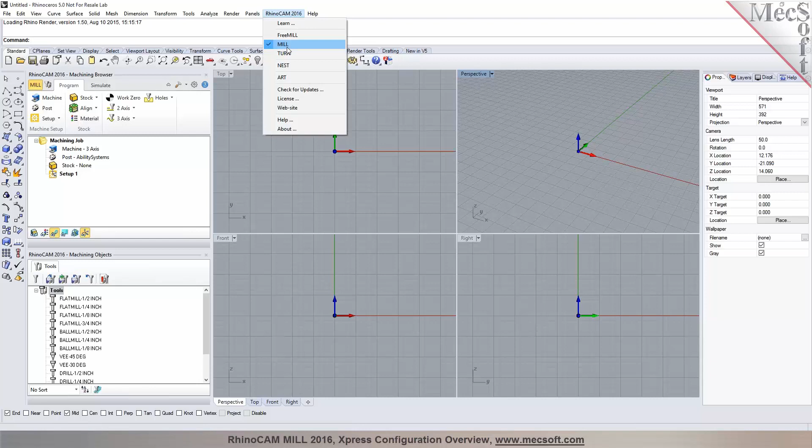This Xpress configuration offers both 2- and 3-axis milling and drilling. There's a limited set of machining operations under 2-axis and 3-axis milling. Once you have the RhinoCAM plugin loaded in Rhinoceros, and if you selected the Xpress configuration in the mill module, you will see the machining browser interface gives you access to 2-axis, 3-axis, and hole machining.

Under the 2-axis, you will have access to facing, pocketing, profiling, and engraving toolpath methods. Now, if you need more options in 2-axis, if you need remachining, high-speed pocketing, V-carving, 2-axis roughing, T-slot machining, then you would want to look at upgrading it to the standard, expert, or if you need remachining as well, you can look at pro or premium configurations.

Under the 3-axis methods, the Xpress configuration includes horizontal roughing and parallel finishing. If you need more finishing options like finishing in levels, which is called horizontal finishing, or radial and spiral machining, those are available starting with the standard configuration. If you need advanced 3-axis machining, those are available in pro and premium configuration.

Now, you can also program holes or drill holes using hole machining and drilling. Drilling, deep drill or peck drilling, break chip, countersink - all of these are offered in the Xpress configurations. If you need tap, bore, and reverse bore operation, those are included starting with the standard configuration of the product. So you can refer to the feature list for detailed information about features offered in each configuration.

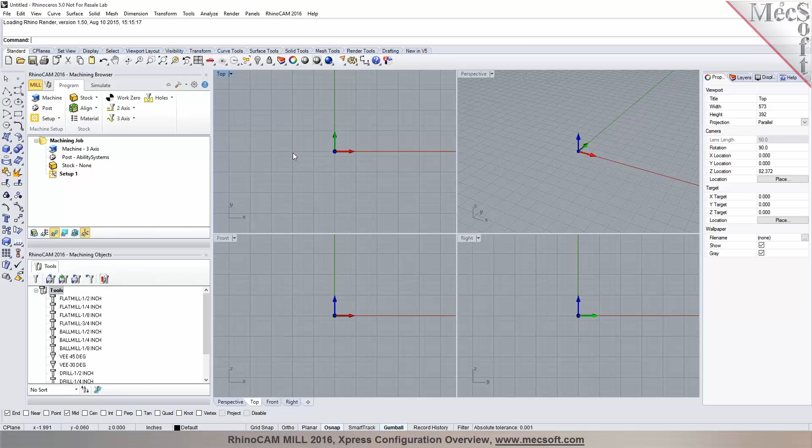Now, you might be wondering, what can I do with the Xpress configurations? What kind of parts can I work with it? So to illustrate this, today I'm going to go ahead and bring in a file into Rhinoceros. You could pretty much open any files that can be loaded into Rhinoceros.

Rhinoceros offers you a wide range of file translators. I'm not going to go into details into those, but any file that you can bring into Rhinoceros, you could program it with the CAM Xpress product. So you could be working with just 2D drawings. You can program 2-axis toolpaths, or if you have solid, surface, or even a mesh geometry, you could program both 2- and 3-axis machining operations with those.

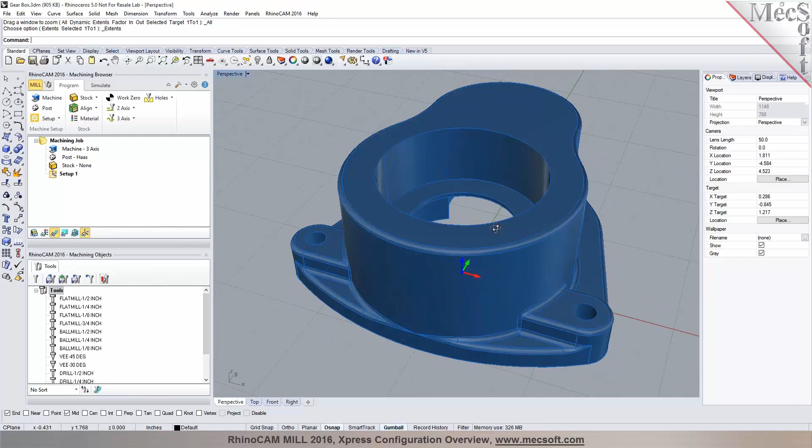Now, what I have here is a gearbox model, as you can tell, and you can view this in multiple viewports, and we will now take a look at how we can program this using our Xpress configuration.

So first step is under the Program tab. You'll notice that there are 3 different groups. You have the machine setup, stock, and then the machining operations. So we work our way from left to right as you work through these groups. And then you have the Simulate tab, where you can run the simulation or the cut verification for the toolpaths that you programmed.

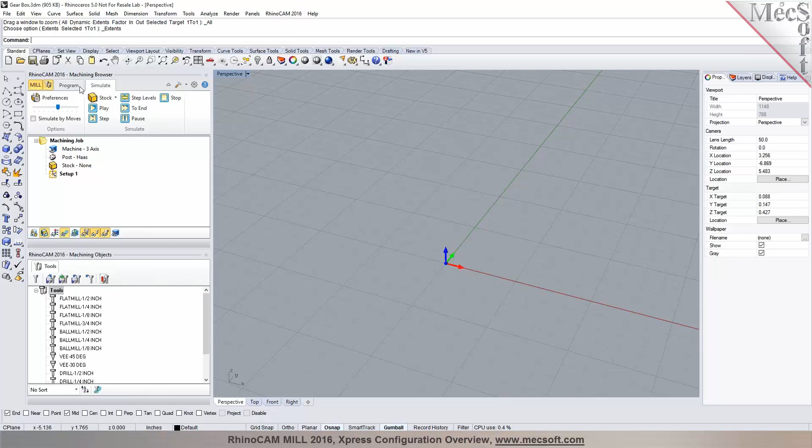Right under the Program tab, or you might see the Machining Objects browser, which is right next to the Program tab, you have the Tools tab in here, which allows you to create tools, edit tools, save and load tools from your tool library as well.

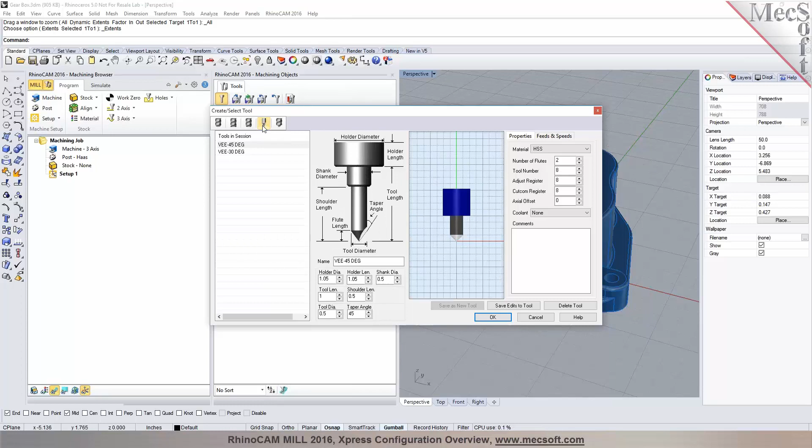Now, with the Xpress configuration, the following tool types are available: ball mills, flat mills, corner radius tools, also known as bullnose cutters, V mills for engraving operations, and drilling tools. If you need additional tool types like a taper mill, chamfer mill, face mills, fillet mills, corner rounding tools, those options are available starting with the standard configuration. So the Xpress configuration includes ball mills, flat mills, corner radius, engraving tools, and drilling tools.

You can create tools under each tool type. You can define the tool parameters. You can preview the tool, and you can specify your tool number, your height offset register. If you have machines with automatic tool changer, you can also set your coolant type.

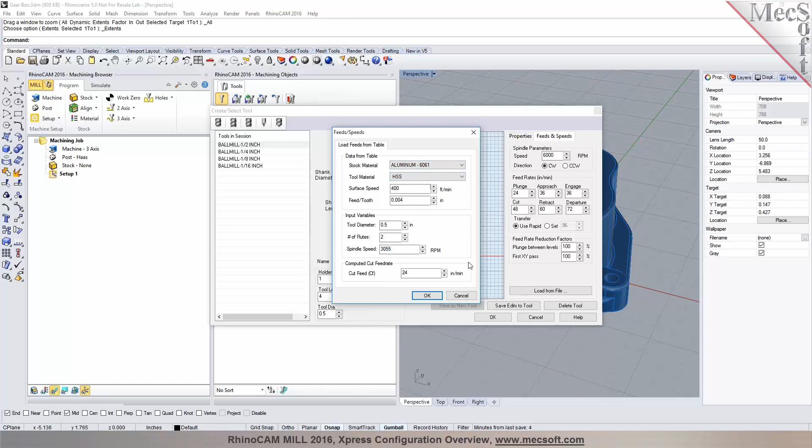And it includes a built-in feeds and speeds calculator where you can use the load from file option, and depending on the material you're working with and the tool material, this can help you with recommendations for feeds and speeds.

Hey Uday, does this come with a standard tool library? Yes, it does. There's a tool library for English tools and metric tools, and by default it's saved in the data folder.

So these are the same tool libraries that come with the higher configurations, except that you can only see the tool types that are available in Xpress. Is that the way it works? That is correct.

Now the typical workflow is once you have the part loaded and oriented, meaning when you look at the part from the top view, you want to make sure the part is in the intended orientation you're going to be milling it from. If you need to change the orientation, you can use the transformation tools available in Rhino to reorient the part, or you can use the setup and orient part feature here to change the orientation.

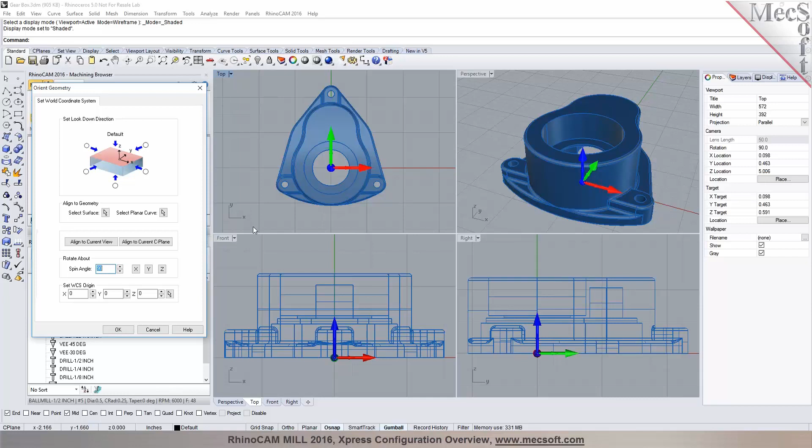So this is how you can change the orientation by choosing a different orientation. Let's say, for example, this part has features on the bottom side. You may want to program some pocket operation, so you'd have to flip the part and then program it. So you will not be able to program multiple different sides or orientations with the Xpress configuration.

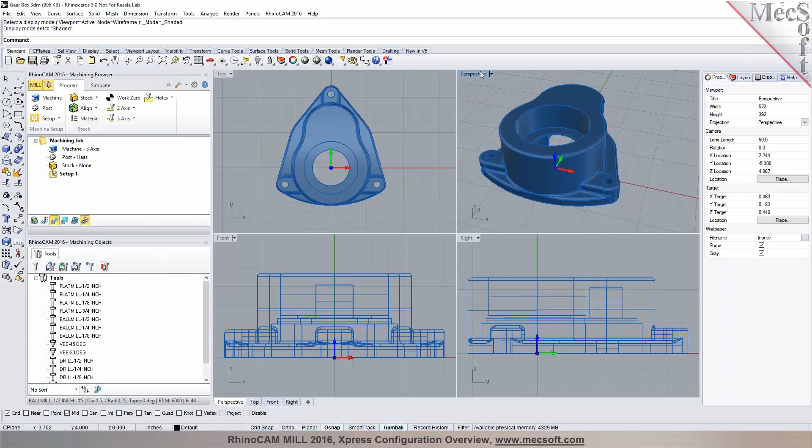Now once you have established the orientation here, the next step is defining the machining process. So for both 2 and 3 axis, the number of axes would be set to 3 axis under machine type in the machine tool setup dialog.

The next step is you want to set or select your post processor. This would be the type of CNC machine tool that you're going to be outputting the toolpaths to as G-code. The RhinoCAM Xpress configuration includes all of the post processors in our other configurations, so we currently have posts for over 225 different machine controllers, covering a wide range of machine tools.

The post processors are listed either by the name of the machine tool or by the controller name, so it's a combination. You can pick the post processor that's appropriate for your machine. Now, if the post processor for your machine is not listed, and if your machine can read standard G and M codes, there's a built-in post-process generator, so you can edit an existing post, or create your own new post-processor in the Xpress configuration.

Yeah, that was another thing I was thinking, Uday. The post-process generator, that's the same generator that's in all of our configurations. I get back to asking what's in Xpress versus our other configurations, and I just wanted to point out that a lot of the stuff you're seeing is in all of the configurations that you can get the product in. Sorry for the interruption, go ahead.

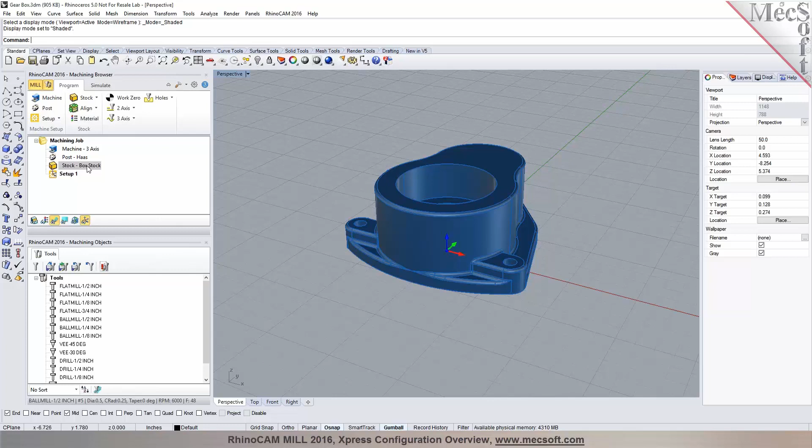Once you have your stock defined, the information is updated under machining job. You can click on stock visibility and the stock you've defined appears on the graphics screen. As you switch over to the Simulate tab, the transparency of the stock display changes. Those can be set or changed under Preferences in the Simulate tab.

With the Xpress configuration, the voxel simulation model, which is our homegrown simulation model, is included. If you need more options or a better advanced simulation, those are offered starting with the Standard configuration of the product. Now once you define the stock, the next step is to align the stock to the part. If you take a look at it from the four different views, you can see that the stock needs to be positioned around the part.

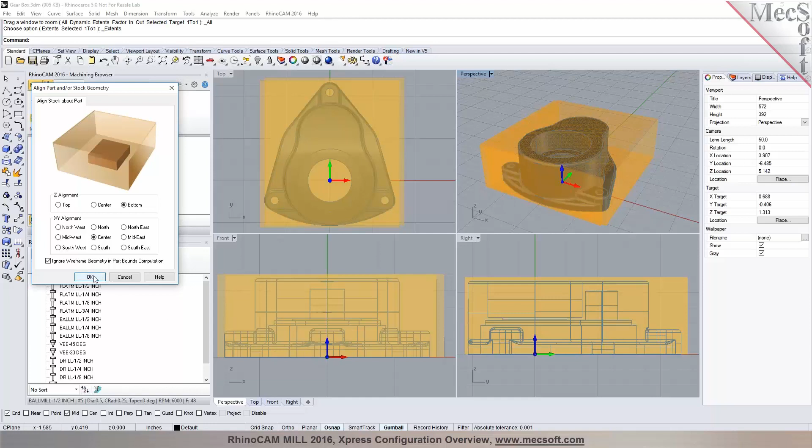So we would go to Align and pick Align Stock. I'm going to align it so it's centered around X and Y, so we can remove material from all the sides. Then I'm going to have it flush to the bottom, since the bottom face of the part is a flat planar surface. I'm going to pick OK. You will now notice that the stock is aligned to the center in X and Y and flush to the bottom.

Now once you have the setup, you can go ahead and establish the location of your origin, or your work zero, also known as a program zero. This can be done in two different ways. One common way is you can transform the part and the stock to the world coordinate system origin. This is done using Align and Set World Coordinate System.

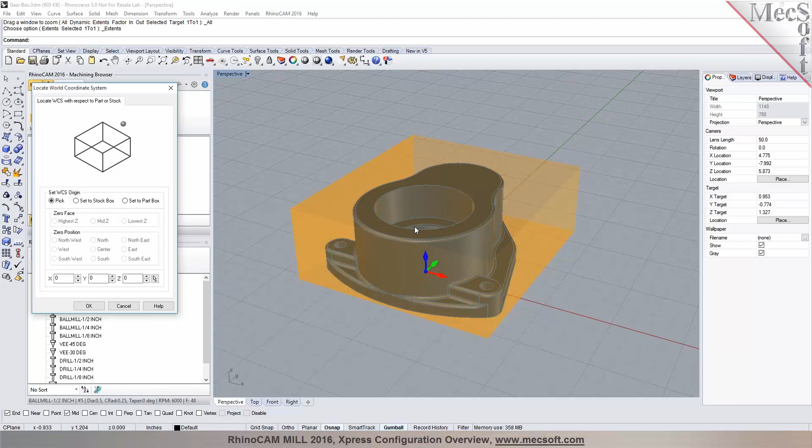You can pick a point, like for example the center of this hole to be your XYZ0, or you could use Set to Stock. You can set it to the extent of one of the corners of the stock box. You could pick the zero face to be the highest Z, mid Z, or lowest Z, and pick your preferred corner. Typically highest Z southwest is commonly used.

You can select this, which will transform the stock and the part to your world coordinate system origin. As you see here, the Z0 is set to the top, and the XY0 is set to the southwest corner.

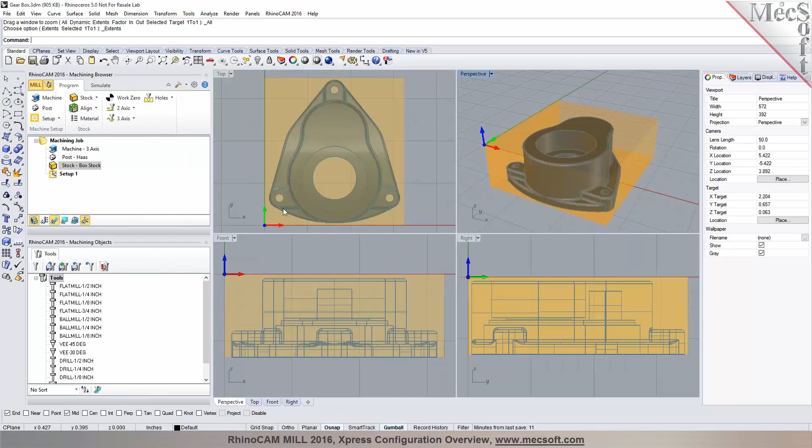Now rather than moving the part and the stock to the world coordinate system origin, you also have an option to establish what is called a work zero, which allows you to transform the machining coordinate system origin independently of your world origin of the CAD model.

In this particular case, if I pick highest Z and northwest corner, your machining origin would be set, your XYZ0 for machining would be set to the northwest corner. However, the origin for the CAD still remains over here.

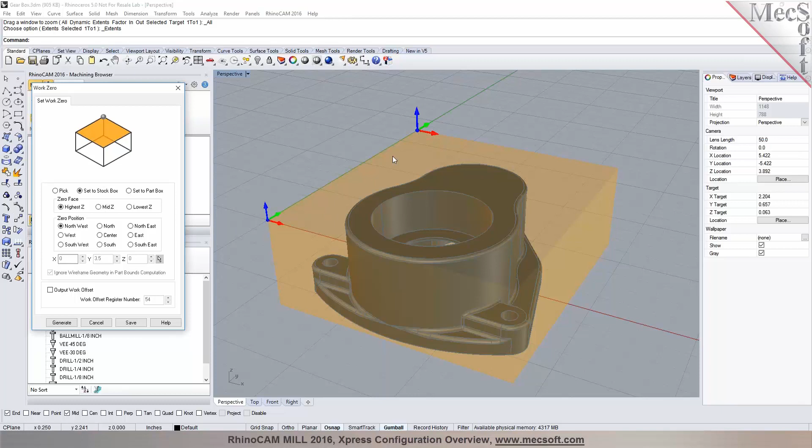Now if you prefer to use the same origin for both machining and the CAD model, you can eliminate the step of creating the work zero and just have the machining origin be coincident with the world origin. In simple terms, when you place the stock blank on your CNC machine tool, you're going to be touching off at the top and the southwest corner to establish your 000 before you run the program.

Now once you establish this, we can then select the material. You can choose the material you'd like to use from the list, and you can also display a texture by toggling the material texture visibility on, which applies a texture on top of the stock blank.

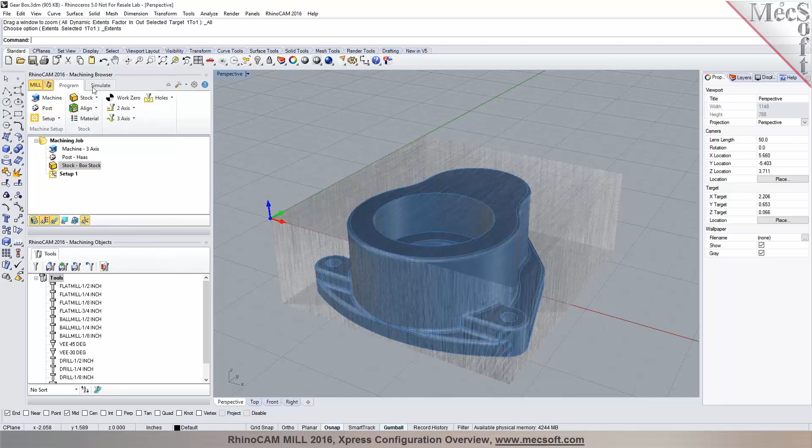In the next step, we're now ready to program this part. Since there is some additional material being left on the top face of the stock blank, I want to face it down to the height of the part, so I could use a 2-axis operation to do that. In order to create a facing operation, I'm going to go ahead and create a boundary around the model that extends to the stock extents.

So I'm going to click on the CAD drawing tool. I'm going to draw a rectangle here, snap it to the grid, and then just throw in a rectangle on top of the part.

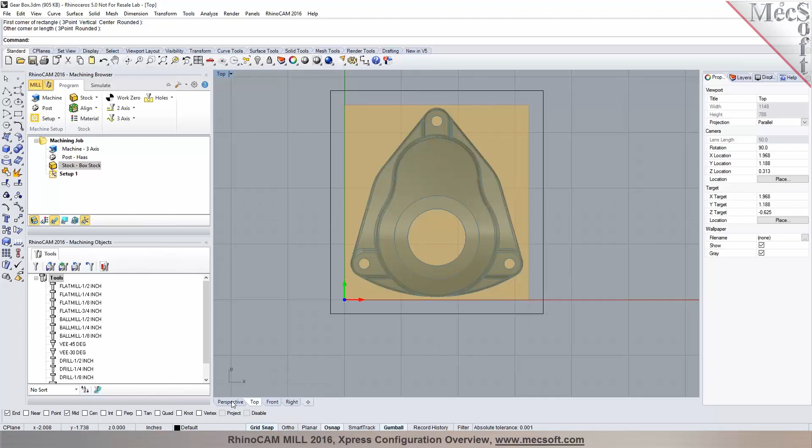Now I'm going to go into the methods under 2-axis. I'm going to use 2-axis and facing. For the part region, I'm going to use the rectangle I just created as the area to face. Then I would go into the tool selection to pick a tool.

So I could be using an end mill or flat mill to program it. If you need to use a face mill tool, you would need to upgrade to the standard, expert, or one of the higher configurations starting with standard. You could program this with a flat mill by specifying the diameter of the cutter, and specify your feeds and speeds.

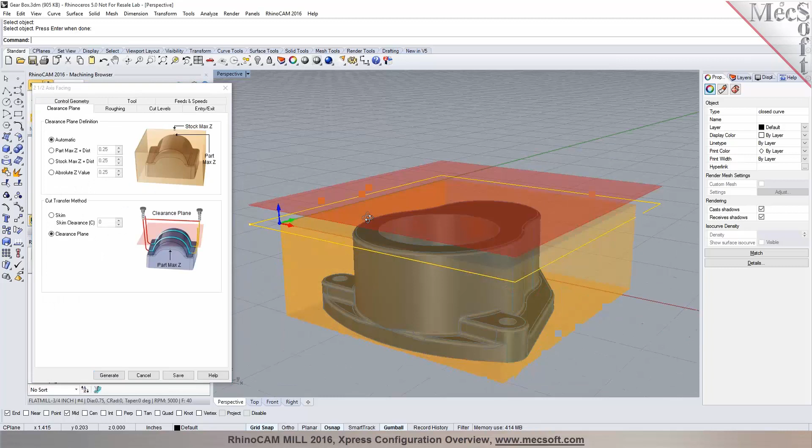I'm going to use load from tool. Set the clearance plane, so the clearance height I'm going to use automatic. Under the roughing tab, I could set my tolerance, stock allowance, and choose the cut pattern, with the option between offset or linear cut pattern. And you can specify a cut direction, your start point, and your step over in here.

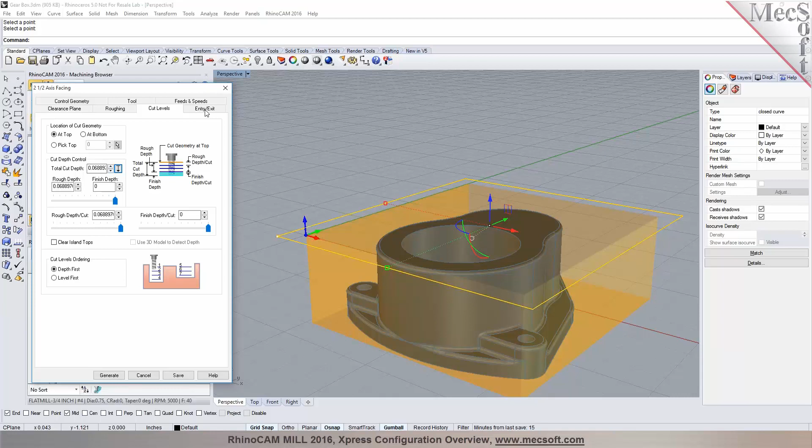In the cut levels, you could also measure the depth by selecting 2 points. You can use the object snaps and pick the top of the stock by snapping to the corner of the rectangle, then pick the top edge on the part, which establishes the height, slightly over 68 thousandths. You can specify your parameters for entry and exit, and then pick generate.

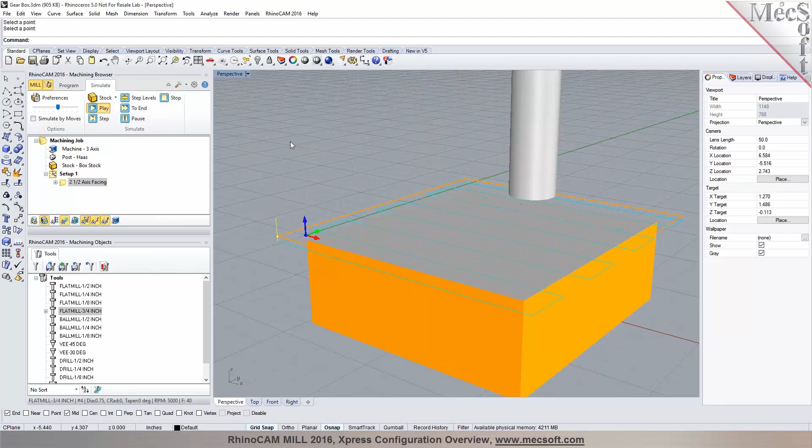Now if you need additional options to perform corner rounding or smooth cut connections, those advanced cut parameter options are available starting with the standard configuration. So with the Xpress configuration, you could create a 2-axis facing operation. And there it is - there's your facing toolpath.

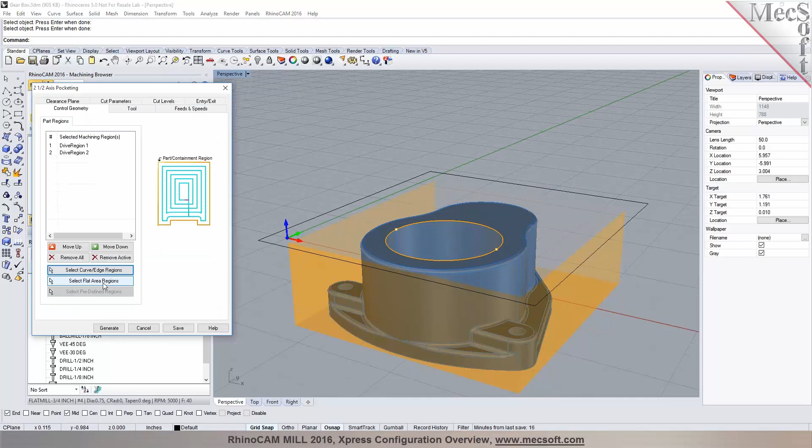Now once you have it faced to the surface of the part, the next step I would like to do is pocket hole feature. I'm going to go to 2-axis and select pocketing, and now I can select my part region. I'm going to use select curve edge regions, and I can either select a face edge or a surface edge from the model, or even use a flat area. In this case, it makes sense to select a face edge.

Now typically in some cases or applications when working with harder materials, you may want to use a pre-drilled location for plunging the cutter in when you do a pocket. The option to select start point is available in our standard, expert, pro, and premium configurations.

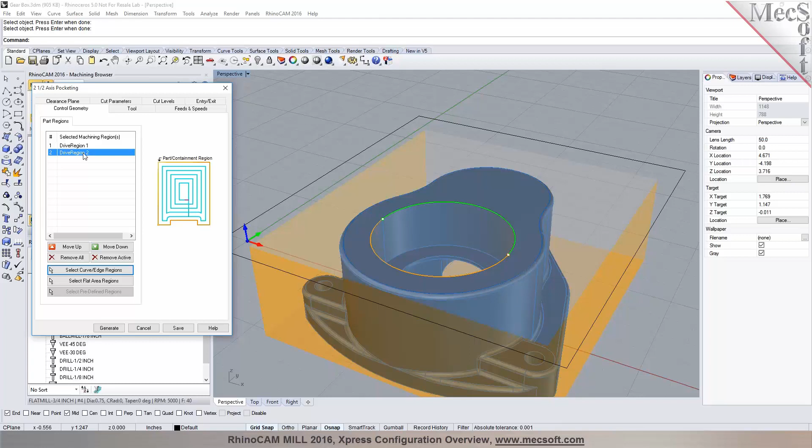Now in the Xpress configuration, you can select the drive geometry and control your entry and exit parameters. However, if you want to precisely pick your start point, you would need to upgrade to one of the other configurations. You can specify a tool for it, so I'm going to go with a 1/2 inch end mill, set the feeds and speeds, set the clearance definition, and then specify your cutting parameters.

You can set your tolerances, your stock allowance, and choose between offset or linear cut pattern. Additional cut patterns like offset spiral, radial, and spiral patterns are offered in standard, expert, and other configurations. You can choose your cut direction and step over distance here.

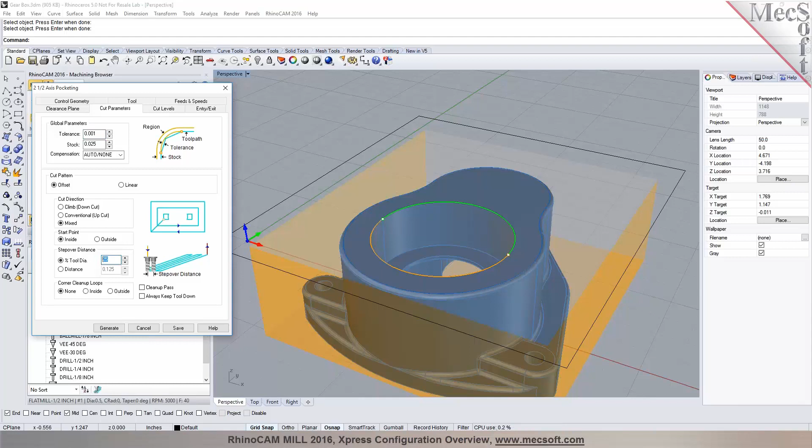You can specify your cut levels, where you can specify the geometry where you select it, if it's at the top of the pocket or the floor of the pocket, and you can measure the depth by selecting 2-point pick, where you can determine the depth between the 2 points.

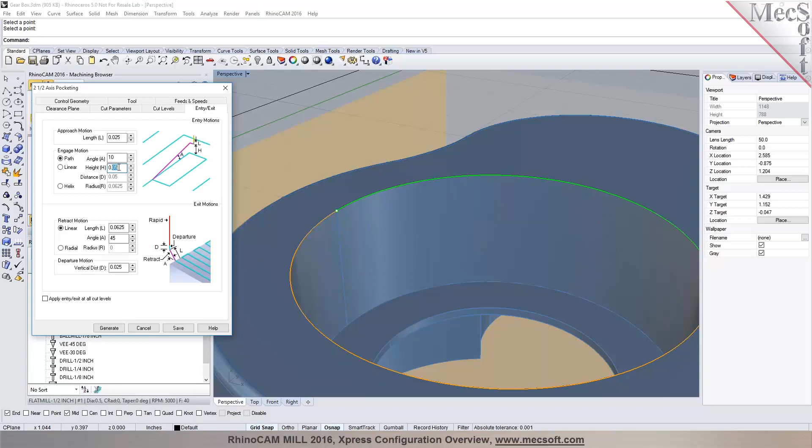Now, starting with our standard configuration, you can automatically determine the depth from the 3D model, so you don't even have to do the additional picks. So if you have the standard configuration, you can do that. Here I'm going to specify my depth per cut to be 100 thousandths, set my entry and exit parameters - you could apply this for each level if you'd like - and then pick generate. And there's your pocket toolpath.

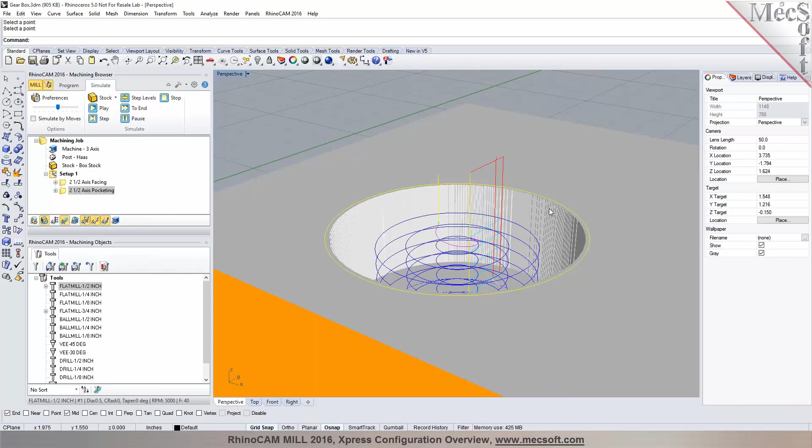You can switch to the Simulate tab and then select Play to run the cut material verification. Now the voxel simulation model does show artifacts along the Z-axis in here. The reason being the resolution is not very fine along the Z-axis, so you're seeing these artifacts.

Now in our higher configurations like the standard, expert, pro, and premium, we also have an additional simulation model called the polygonal in addition to voxel, and with that simulation you would no longer see any of these artifacts. So this is just a limitation of the voxel simulation model.

And the limitation is you can only machine and program and simulate it from one side. So once you're through with the pocketing, if you want to go back and finish the side wall, since you left some stock, you could program a profile operation in here. And you can select the same face edge.

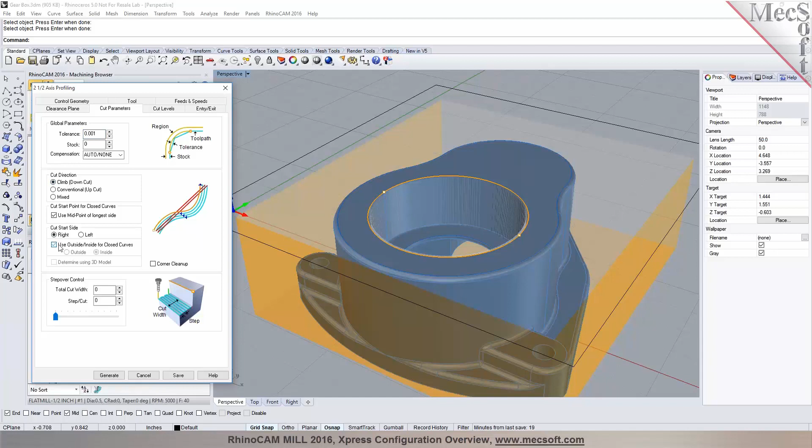I could choose a cutter for it, set the feeds and speeds, set the clearance definition. Under cut parameters, I could set the tolerances, choose the cut direction, and in here I'm going to choose the side to cut. I'm going to pick inside or outside.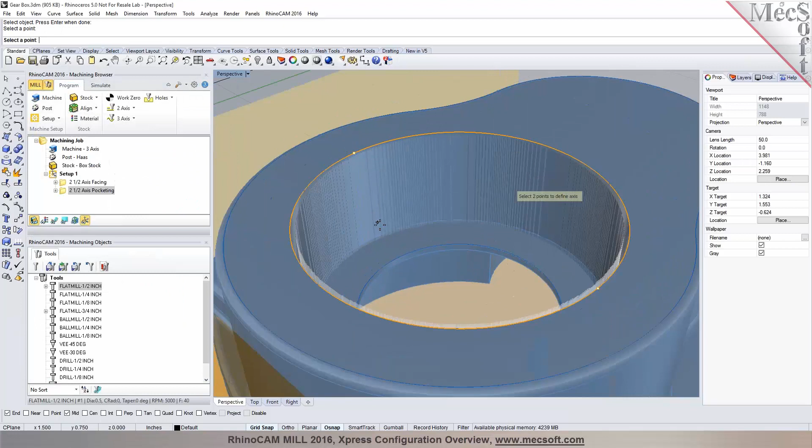Now in the higher configurations, you can automatically determine based off the 3D model which side to place the cutter. So here in this particular configuration, you'd have to manually pick whether you're going to be profiling outside or inside, and then you can measure the depth by picking 2 points. If you need automatic depth determination, those options are available starting with the standard configuration.

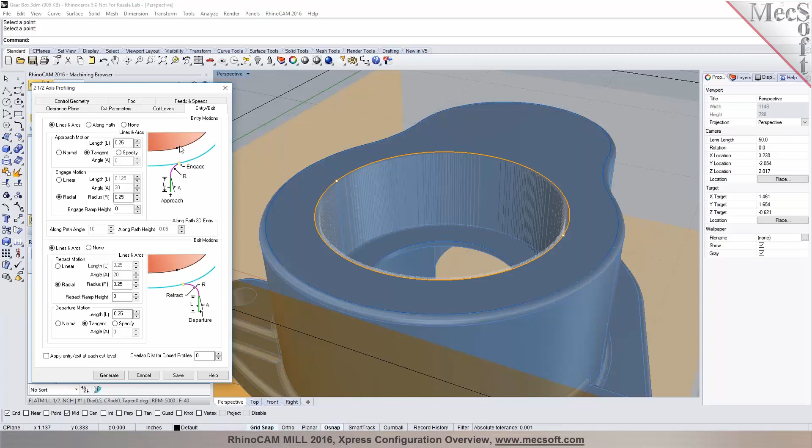You can set your entry and exit. Now if you need to be able to add bridges and tabs or any additional functionalities, or you want to perform arc fitting, any of those are offered under the Advanced Cut Parameters tab, which is available starting with the standard configuration of the product.

And there's your profile toolpath, the finishing toolpath. Let's go and run a verification on it. And there it is. Now we've already finished the pocket on the inside. The next step is we want to go ahead and rough the exterior on the part in here.

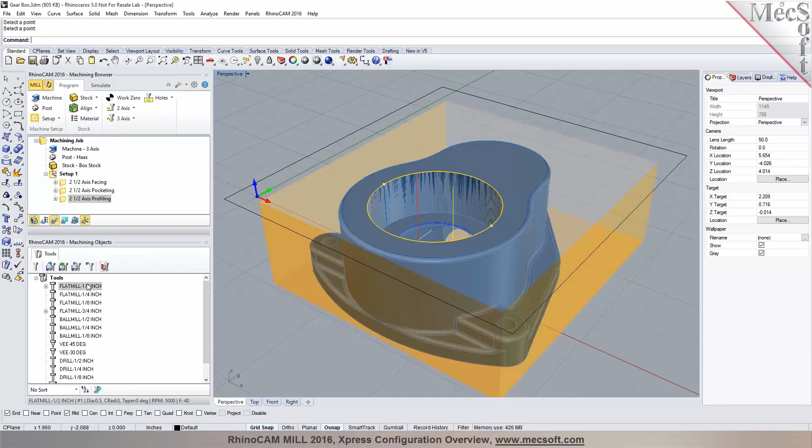So we're going to use a 3-axis method to rough it. So we're going to use 3-axis and horizontal roughing. So you can go up to the 3-axis methods and pick roughing. Now this is also known as horizontal roughing or roughing in levels or Z-level roughing or roughing in layers as you call it.

So since I would like to rough between these two areas, I'm going to pick these as my containment region, select a tool, specify feeds and speeds, very similar to how we did on the other 2-axis operations, and set the clearance to be automatic.

Under the cutting parameters, you can set your tolerances, you can set the stock to leave, and you can choose from the available cut patterns in here.

So the system can automatically determine based on core and cavity regions. If you pick facing, it'll identify it and use facing for core areas, and then if you have cavities, you can either pick from offset or linear cuts. Additional cut patterns for cavities are offered in standard, Expert, Pro.

You can pick your cut direction, you can specify your step over in here, and then you can also set your cut levels under the step down control tab.

You also have the option to clean up the flats, where you can select them and specify your engage and retract parameters and then pick generate. If you need additional options to perform corner rounding or fit arcs to toolpaths and 3-axis roughing, those options are available starting with the standard configuration.

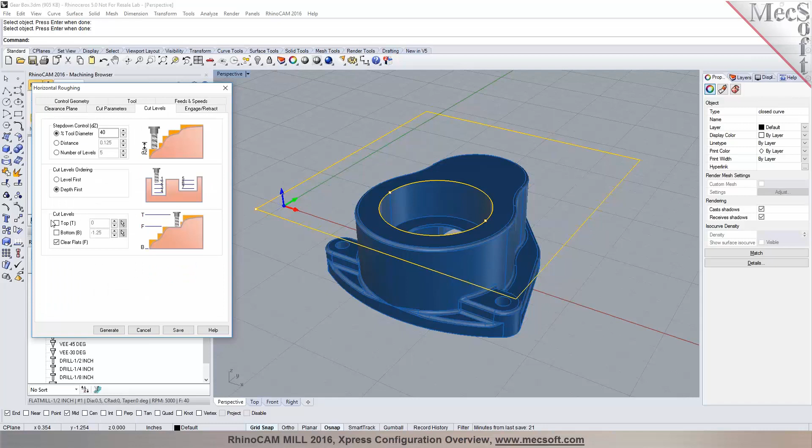If you need to make any changes in here, you can always double click on it. You can edit each of these operations. You can also modify your cut levels in here. If you want to modify the start or top of cut, you can change those and then go back and regenerate it. So there's your roughing in levels.

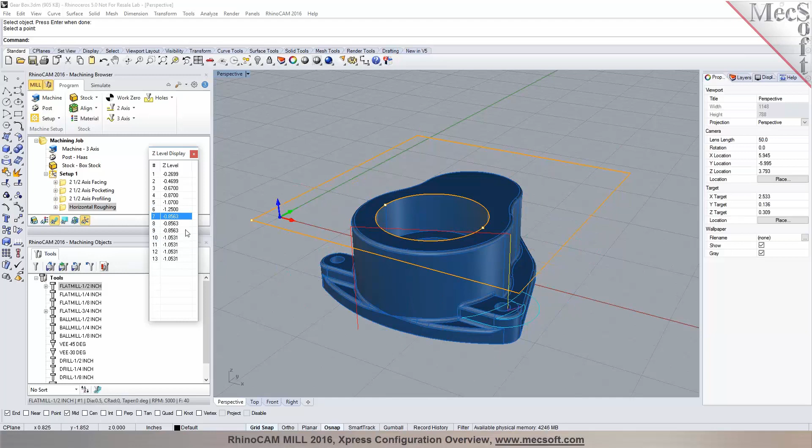You can view the toolpath as you step through each of those Z levels, and you can notice that the clear flats automatically also cleans up these flat areas in the part. Let's switch to the Simulate tab and then hit the play button to run the verification.

That's nice, Uday. There's a lot of functionality in the Xpress version. Absolutely. You get the full 3D machining capabilities in addition to 2-axis facing, pocketing, profiling, and engraving. So you could do a whole lot with the Xpress configurations.

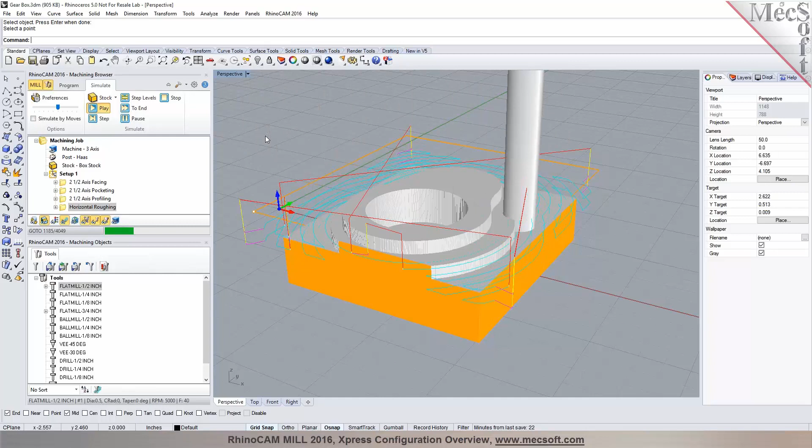Now, if you need any additional functionalities that you think would be really beneficial for your machining needs, you have the path to upgrade to the higher configurations. That's the next question I was going to ask. How easy is it for users to upgrade? Does it have to reinstall or what?

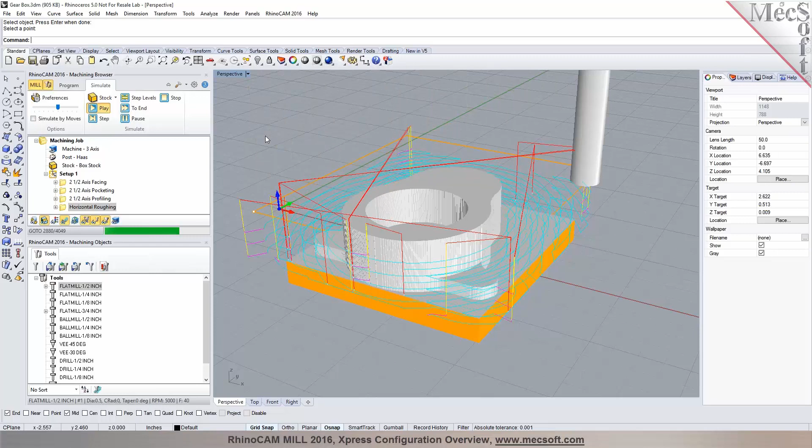Well, the upgrade process is very simple. So once you purchase the upgrade, your license would get updated. So you just have to release the license and activate it again, and you're all set. So you don't need to uninstall and reinstall, or there's no additional installation. All the capabilities are built into the initial installation, and you just, with a new activation code and license code, those new capabilities become available. Absolutely. That's correct.

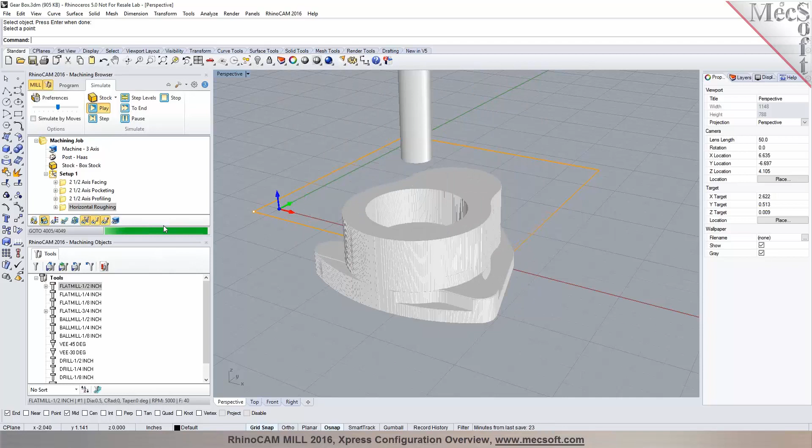And there it is. It's roughed out right there.

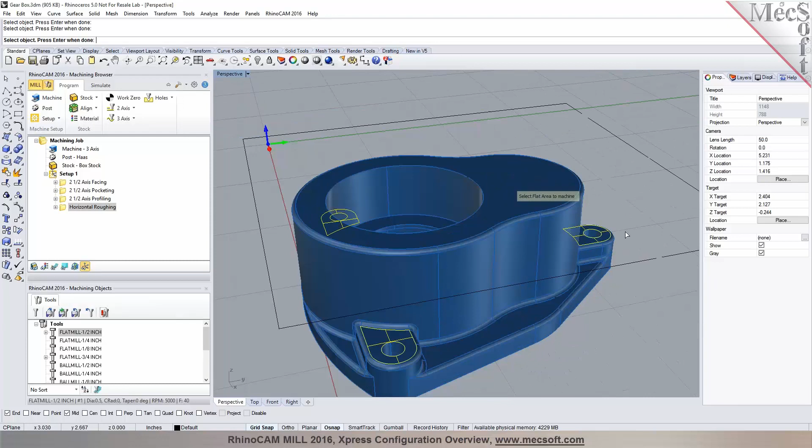The next step is to drill those holes on these flat areas, so we can do hole machining and drilling. You can use select holes on a flat area and pick those flat faces on the part, or you could even just select the face edges from the hole. Here I'm going to use just the holes in the flat area.

Grab a tool for drilling, so I could go with a 1/4 inch drill, set my feeds and speeds, set the clearance. In the cutting parameters, you could choose from the drill types: standard drill, deep drill, countersunk, break chip. You have all of these options in here.

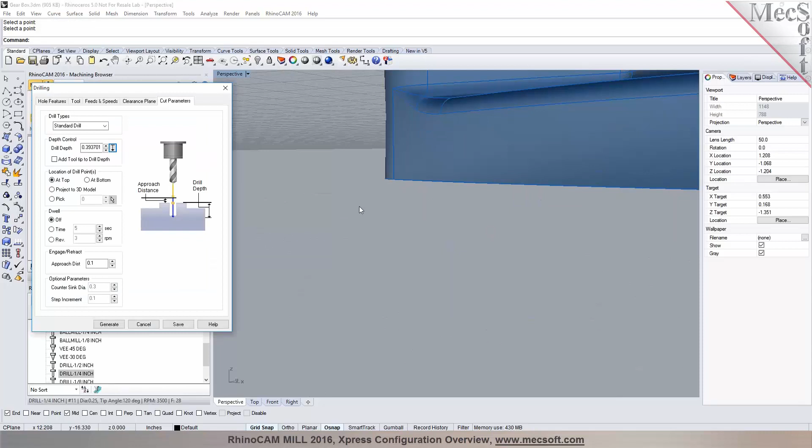Then you pick the depth in here. You can measure the depth, so pick the top edge, go pick a point, and pick up at the bottom edge of the part. Since this is a through hole, you can say add tooltip to drill depth, so it automatically compensates for the taper on the tool to make it a through hole, and pick generate.

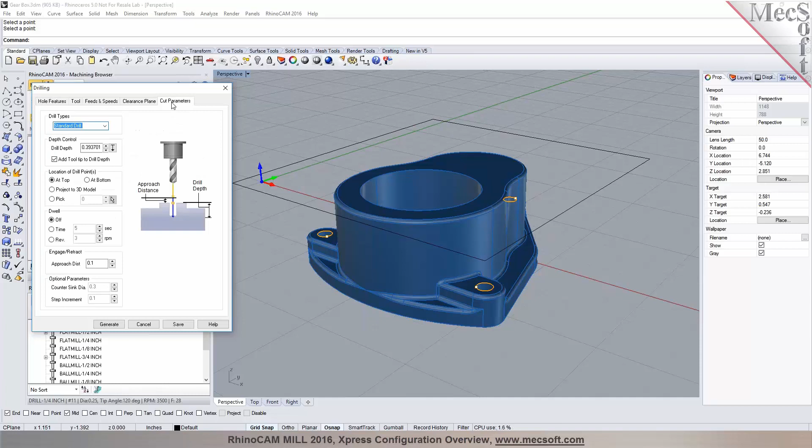Now, one thing I noticed is that even though when you go into the 2-axis holes menu, you only have one option to drill, in the drill types you've got all these different drill types. You can do countersink, break chip, deep drill, so it's not just a single drilling operation. You can use it for a lot of different things.

That is correct. We do the drill cycles: standard drill G81, G83 for deep drill or peck drilling. We do countersunk G82. We do all of these drill cycles in here. Nice.

There it is, so you've got it programmed right there. Now, if you'd like to sort the holes or pick a sequence in which you want to drill or pocket them, the sorting features are available only starting with the standard configuration, so they're not included in the Xpress configuration. Yeah, like if you had a plate with 100 holes in it.

Right. So currently it'll automatically drill them in the order in which you selected them. If you randomly drag a window to select them, it'll select them in the order in which they've been created. But if you want to be able to precisely sort them, then you could look at upgrading to the next higher level configuration.

So now once you have this programmed, you can go back and run the simulation. And there it is, there's your drill.

Then we want to go ahead and finish these sculpted surfaces in here. So we're going to program using a 3-axis method. We're going to use parallel finishing. Now this is also offered in the Xpress configuration.

You can select a tool. Typically for parallel finishing, you would want to use a radius tool like a ball mill or a corner radius tool. Set your feeds and speeds and clearance. In the cutting parameters, you can specify your tolerances and your cut direction. You can also control the angle or direction of cut - if you set it to 0, it'll go in parallel planes along the x-axis.

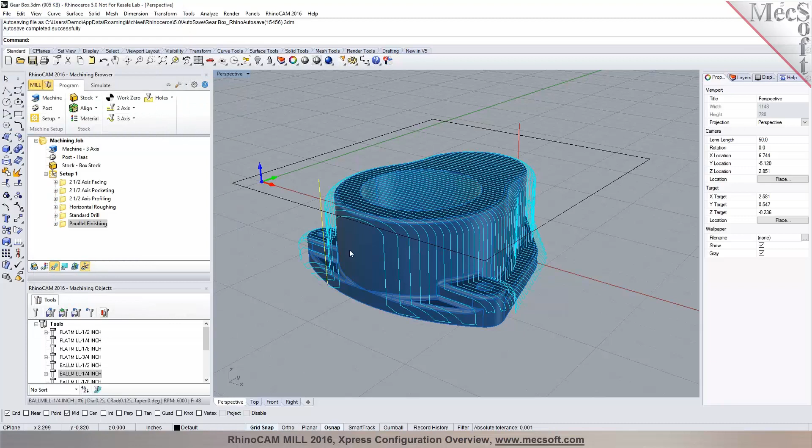So there's your parallel finishing. You can see that when the angle of cut is set parallel to X, you end up with these scallops in these areas. On the steeper section, you could go back and repeat the parallel finishing operation and change your angle of cut from 0 to 45 or 90 and cut it in a cross direction to clean it up. And there it is.

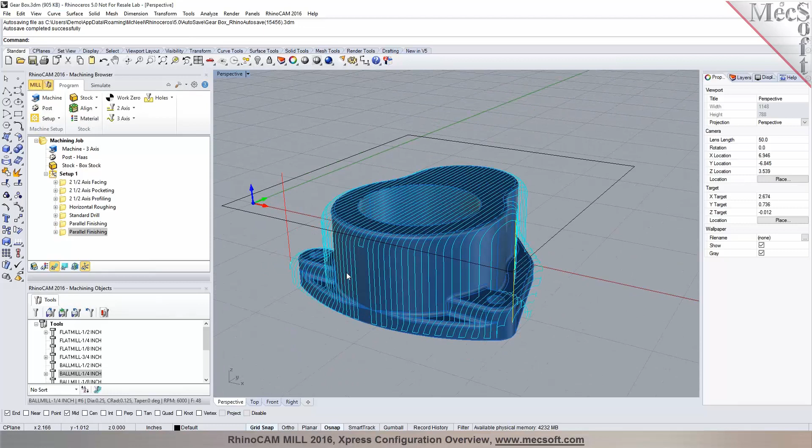There's your parallel finishing. Finally, after you're done finishing, if you want to run through the simulation, you can use simulate to end, which basically runs through the simulation for each of these operations. And if you want to profile cut it to finish it, you can add a 2-axis profile operation and have it follow the outer periphery of the part.

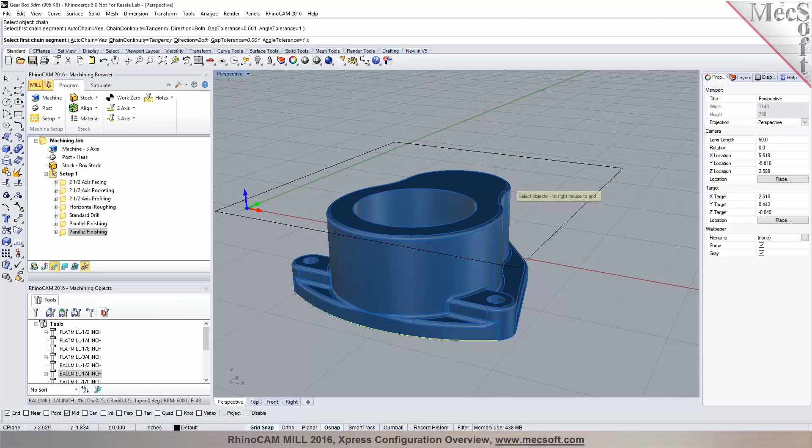And I'm going to select the chain of edges and grab a tool for it. So we'll use an end mill. Set the feeds and speeds, clearance, and choose what side you want to cut outside.

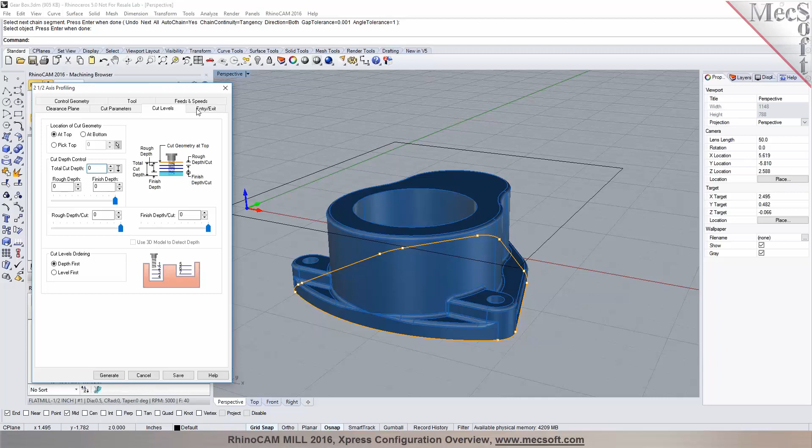If you want to do automatic determination, this option is available starting with the standard configuration. You set your cut levels, set your entry and exit, and then generate it. There's your profile cut. You can go run a verification for it.

Look at this, that's nice. So this Xpress configuration includes a wide range of methods in here for your toolpath.

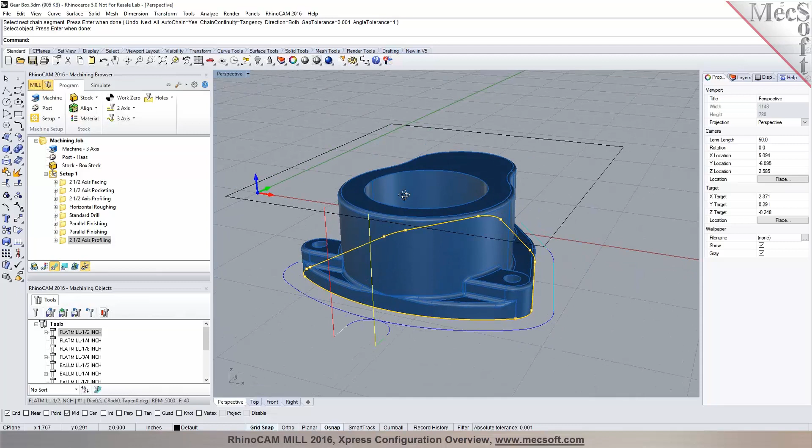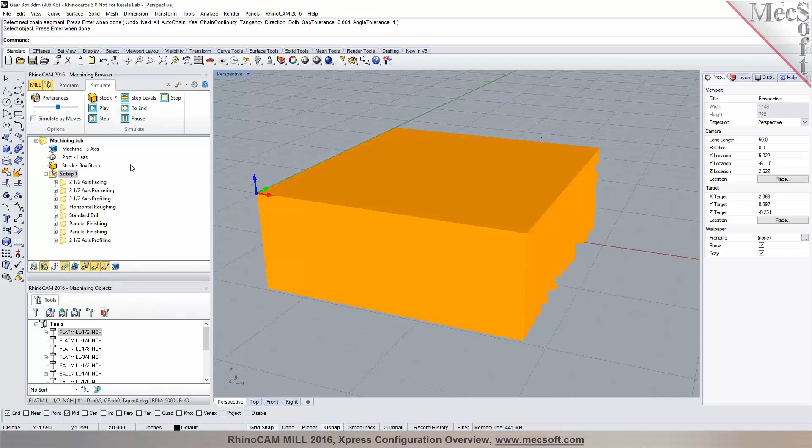Could you tell us what are the limitations of the demo module when you download it and run it in demo? What can't you do? In the demo, you will not be able to save the machining operations to your Rhino file, or post-process it out to your machine. But you can program, simulate, and verify all your toolpaths.

When they verify the toolpath, they can actually look. There's a viewer where they can look at the code too without posting it, right? Absolutely. You can expand any one of your machining operations and double click on this toolpath, and you'll get this toolpath viewer where you can step through it, and it shows basically your cutter location file. These are your XYZ coordinates, as you can see right there.

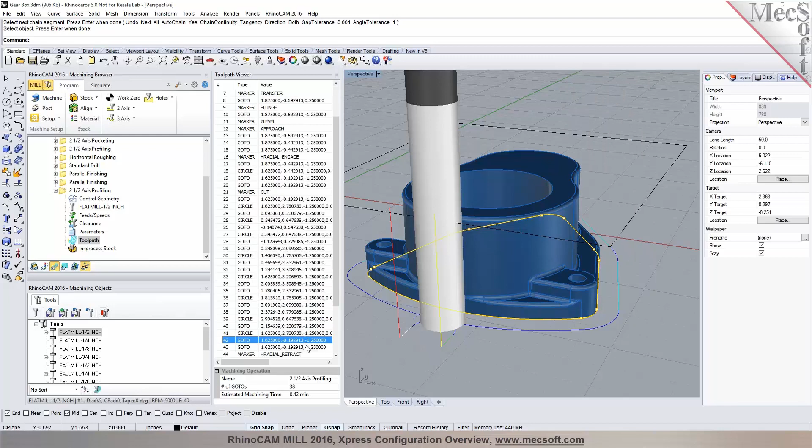Now once you purchase a license, it's pretty easy to activate it in here. You just go up to RhinoCAM, click on license, enter your activation code, and then hit register.

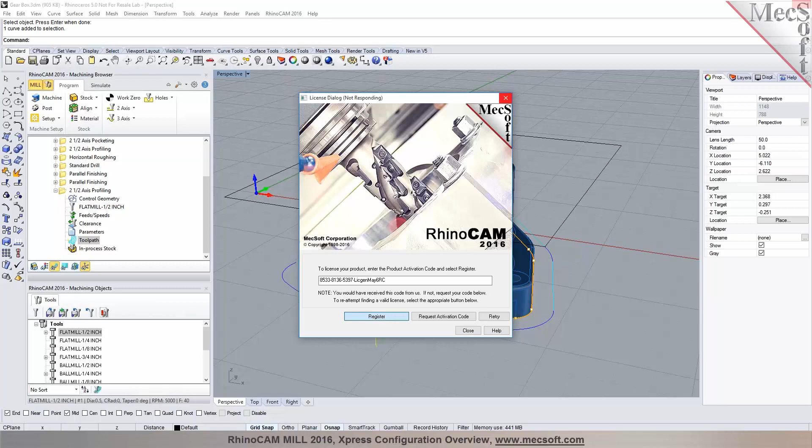Before we wrap this up, could you give us just a brief review of what's available in the next configuration up? Because users might be looking at purchasing the product, and they may start looking at the lowest configuration, Xpress, but then be wondering, well, what else do I get in the standard configuration?

Sure. The standard, in addition to these methods, you also get 2-axis roughing. You get high-speed pocketing under 2-axis, V-carving, V-carve roughing. You get hole pocketing, hole profiling, thread milling. You also get T-slot machining under the 2-axis methods, starting with the standard configuration.

Now under 3-axis, you get 5 different types of 3-axis toolpath methods in the standard, and there's more than 15 to 18 methods in the Pro under the 3-axis methods. And I believe also you get all of the hole operations in the standard too, don't you?

Absolutely. And also you get the options to create predefined regions for bridges and tabs. You can do hole feature detection in the standard configuration, and you have the knowledge base feature where you can save and load machining operations from a knowledge base to automate some of your workflow to make it a lot easier.

So the knowledge base is not available in the Xpress configuration. And plus, I think you mentioned in some of those operations there's advanced parameter tabs available in higher configurations that aren't available here.

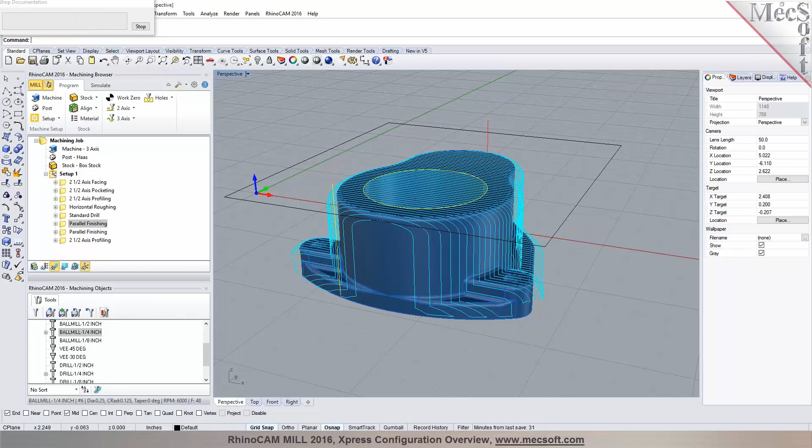You could also generate a shop documentation, and basically you specify a template and specify a location. You hit save, and that basically creates a setup information sheet, so the operator on the shop floor can be well prepared to load the G-code and run the program. It gives you information about your tool, your feeds and speeds, the stock dimensions, and it includes a screen capture of the toolpaths you programmed as well.

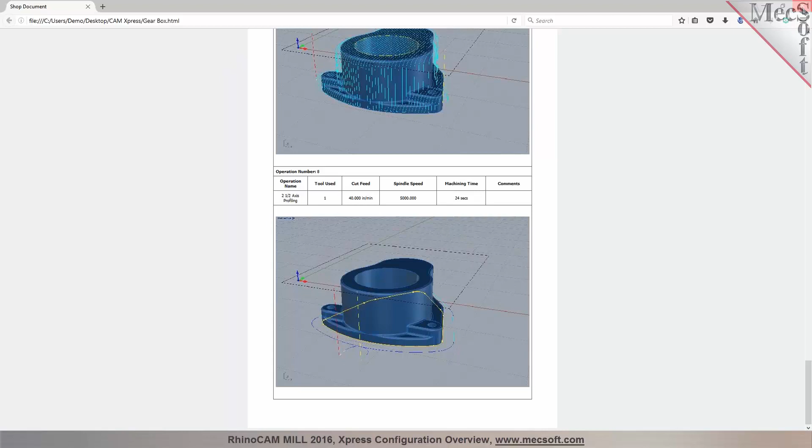And finally, once you are happy with the toolpaths that you programmed, you can go ahead and do a post process to write this out to your posted output file. And your posted output file automatically appears in your text editor. You can see that it outputs your tool changes, calls up your work offset, which is your G54.

And there's your output for your facing. Then you go down to the pocketing operation. Nice, it follows right there.

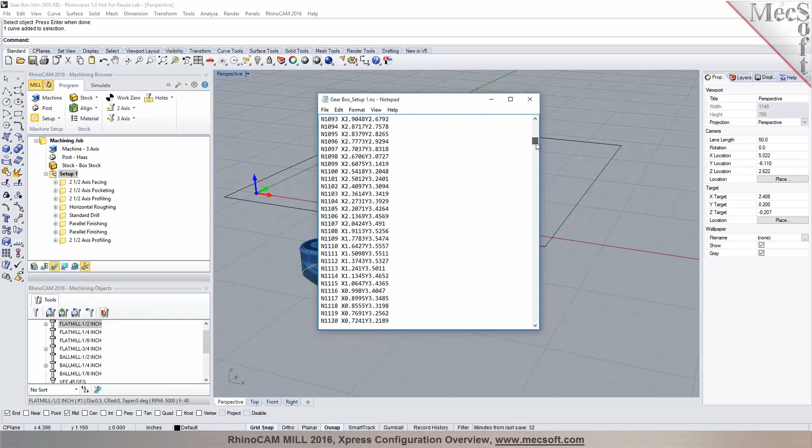Yeah, I think this is going to be a really popular configuration. I like it, it's packed with a lot of features, and it's easy to use, and you have options to upgrade to higher configurations. So this basically gives you a quick overview of the new Xpress configuration that's being offered in RhinoCAM 2016.